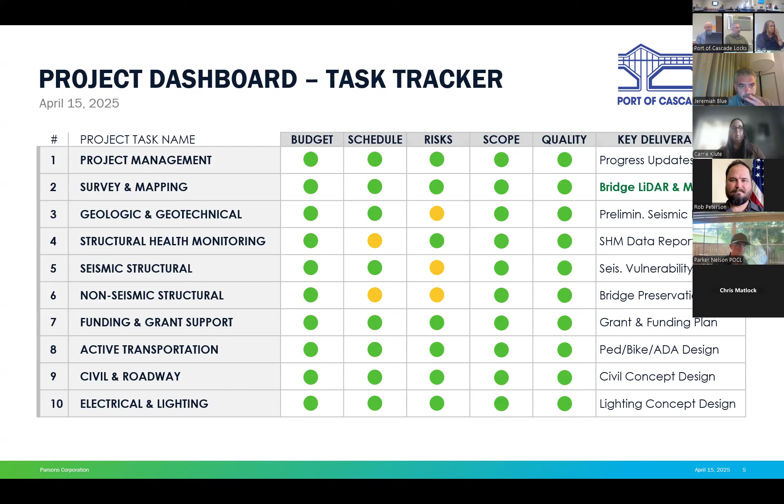So you can see we completed the survey and mapping, and the next thing that we do intend to complete is the bridge drawing set. I'm not going to bore you with that today because it's about 30 plus drawings right now of the bridge, the drawings that we didn't have. And that's quite useful in terms of current analysis as well as any future plans. Imagine if you wanted to widen the bridge or put a bike path on the side - we need those drawings to be able to do that.

So the real milestone for funding and grants is the grant funding plan. We actually did have a workshop where we talked about what are the potential funding opportunities. There's quite a few out there, a lot of them are tied to federal funds. So there's a number of steps along the way, deliverables, we'll call them, to get to that grant and funding plan, but that's still a work in progress. Did I answer your question? Yeah, okay, thank you.

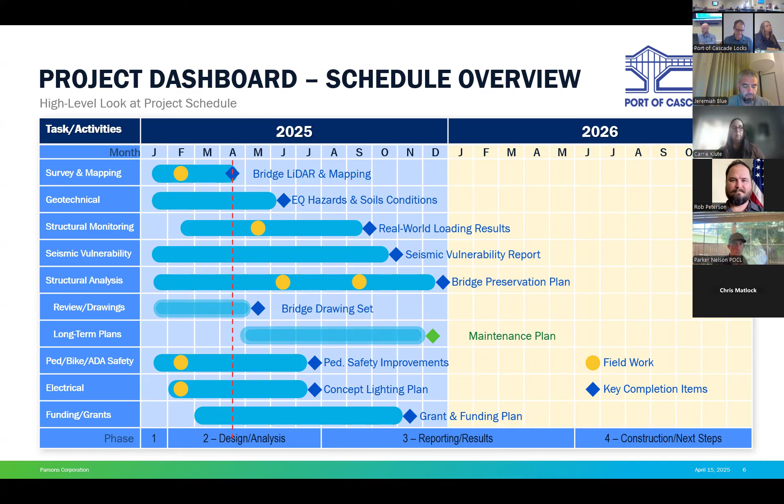Okay, so a couple key updates. Field survey and drone scan is done. We have a 3D model of the physical world, the slopes of the ground, the railroad. We can use that model for all kinds of things for design and for construction eventually.

We held a small internal workshop on funding to talk about what's possible, what's out there, and start to think about if the board is interested in pursuing additional funding from external sources, what kind of projects would we actually be able to align with that funding opportunity. For example, putting lighting on the bridge - is there a funding or grant opportunity out there where the board could seek that grant and get some funds to be able to do that?

Another example is ped bike - any kind of ped bike improvement. There's a lot of grant opportunities out there, and Genevieve is pretty aware of a lot of these things too. So we're starting to tie together the physical improvements needed on the bridge and off the bridge, approaching the bridge, and how we could actually go after a grant or package things together without just going in with a huge ask to the states or the feds. Lots more to come on that later. I'm happy to answer questions, but we're not ready for that to be a focus today.

We do have a structural health monitoring plan, and it's ready to go. That's putting strain gauges and all kinds of cool gadgets on the bridge to measure what's happening on a day-to-day basis, where we can literally tell, hey, a truck went by, this was the weight of the truck, and this is how the bridge responded in terms of stress. We can then take that information and translate it to things like lifespan of the bridge, and determine what's the right thing to do in terms of retrofit. There's quite a bit coming there in the future - I'll spend a lot more time on that later too, because those field installations are coming up pretty soon.

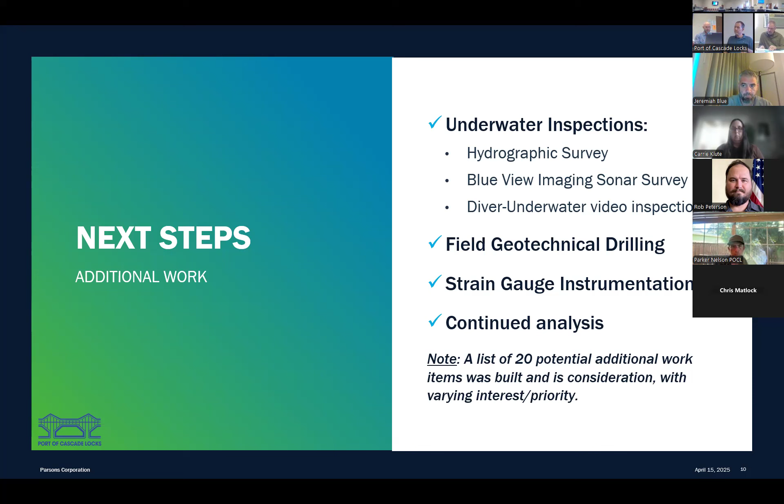Well, if it's decayed or missing something, or there's a big scour hole, and if you're curious, go stand out by the bridge on the Oregon side in that little viewing area. If you look at the river, you can actually see these big turbulent pools around the backside of the pier on the downstream side, and that creates scour holes at the edges of piers.

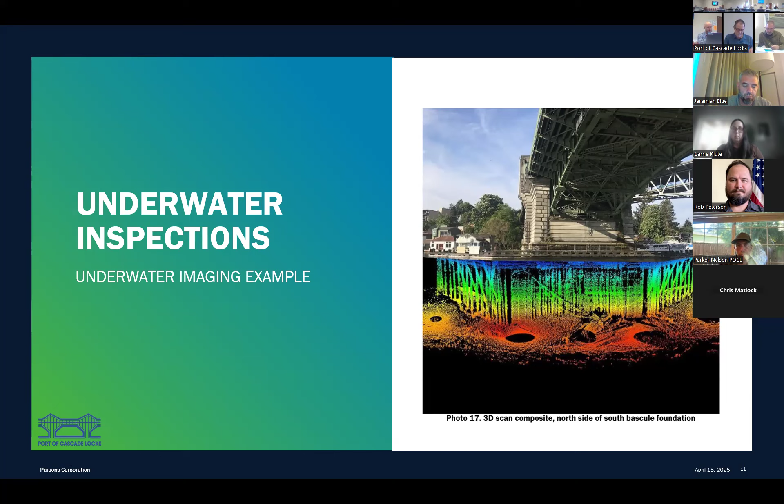So currently we have a plan. There's 5 potential borings, so drilling down, 2 in the water, which we probably won't do because we don't think we have to have them right now. So we're going to hold off, and they're expensive. So we're just going to wait on that. That doesn't make a ton of sense, but...

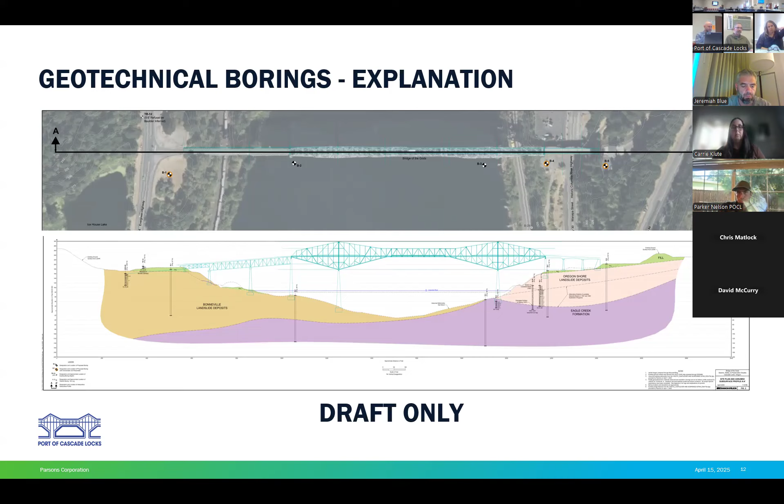So that was a pretty deep dive. I think that was my 20 minutes.

So anyway, I'll skip over this because we kind of already talked about it, but there are things coming out in May and June that will be physical field work. So now I have some fun things for you here, and I'll go through this kind of quickly.

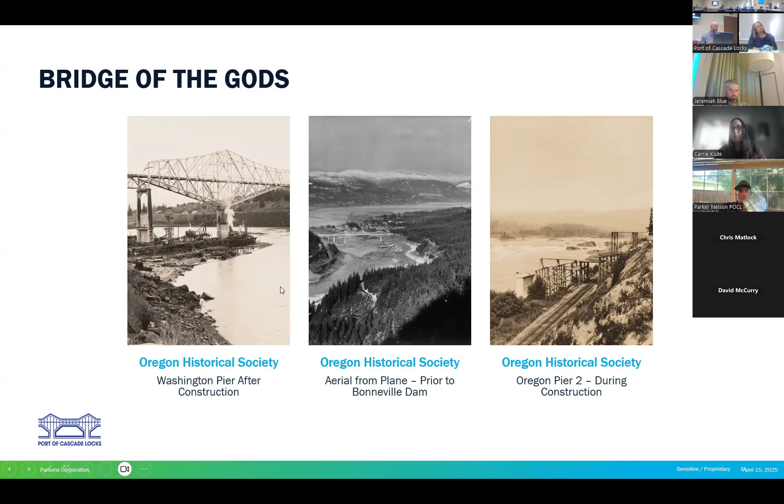What's eluded us this whole time is who actually designed the bridge and who actually built it. We had believed the Wauna Toll Company, just a rich family in Walla Walla, started up a company called the Wauna Toll Company and financed the project, but they didn't actually build the bridge - they contracted out to somebody to build it. So I was looking at this photo, and sure enough, on the right side, there was a sign - and sure enough it read Puget Sound Bridge and Dredging Company, engineering and construction, Portland, Vancouver, Seattle.

I thought, well, that's a pretty good lead from the Oregon Historical Society. Very cool. And they were on my radar for potentially having designed and constructed this, but we didn't really know. There was nothing in the Wauna Toll Company records in Walla Walla that said anything about this company.

So I went up to Seattle. Actually, I was already talking to him, so I kind of chatted with him back and forth. And I said, do you have anything there on the Bridge of the Gods? Nothing digital, he said, but there were some folders and a couple boxes of stuff. Oh, all right, I'll come up there and take a peek. So I took a trip to Seattle.

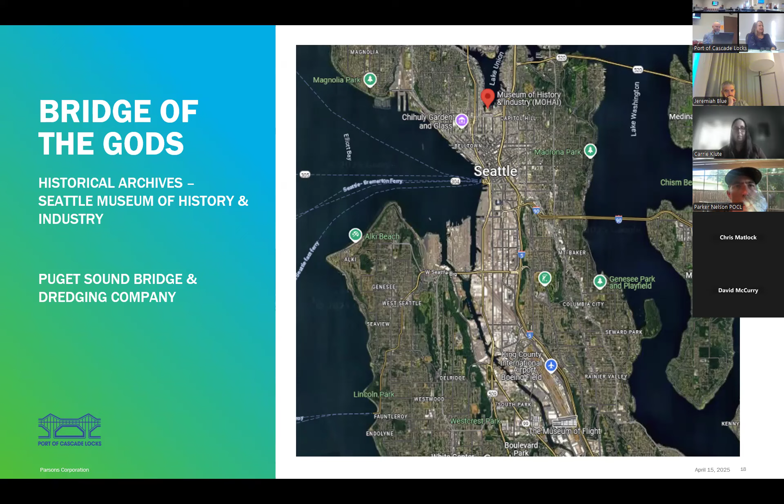I'd actually been here before, this museum. I'd actually talked to them already, and they were like, nah, we don't have anything. So I was digging deeper through their records, and I'm like, there's a folder here, and it says Wauna Toll Company, and we got to take a look, right? So I went up there, and found out more about this Puget Sound Bridge and Dredging Company.

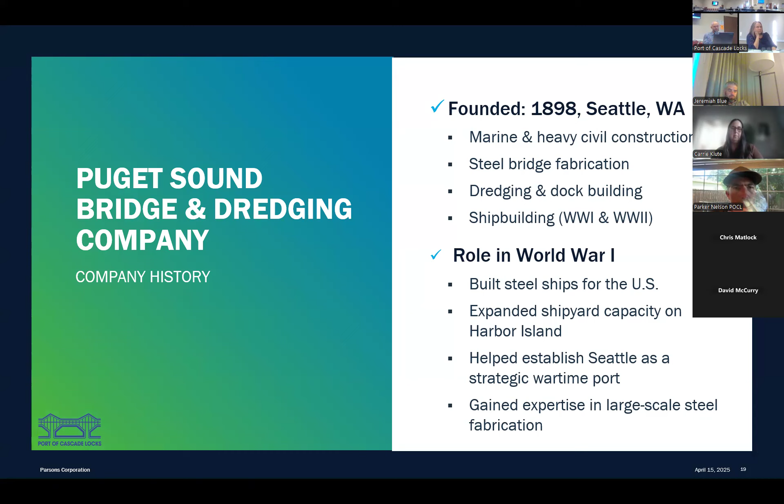If you're a history buff, basically the story goes like this. They built ships in World War One, and then World War One ended. And then in between World War One and World War Two, they did things in the US like build bridges and dredge to help build up Seattle. This particular company actually helped build Harbor Island, which, if you know, Seattle is a huge shipping area right now, and historically it was actually where they built a lot of ships, especially during World War II.

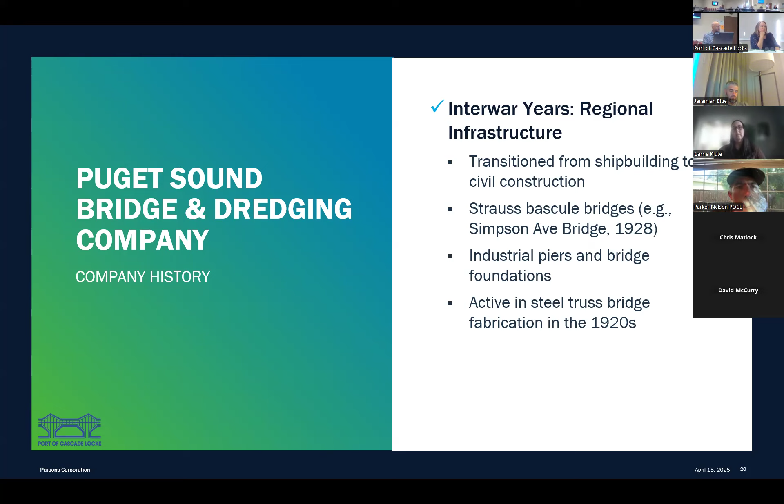Eventually, it got bought by the Lockheed Company and sort of dissolved. The Lockheed Company portion of the shipbuilding dissolved and ceased in 1987. But there are some archives.

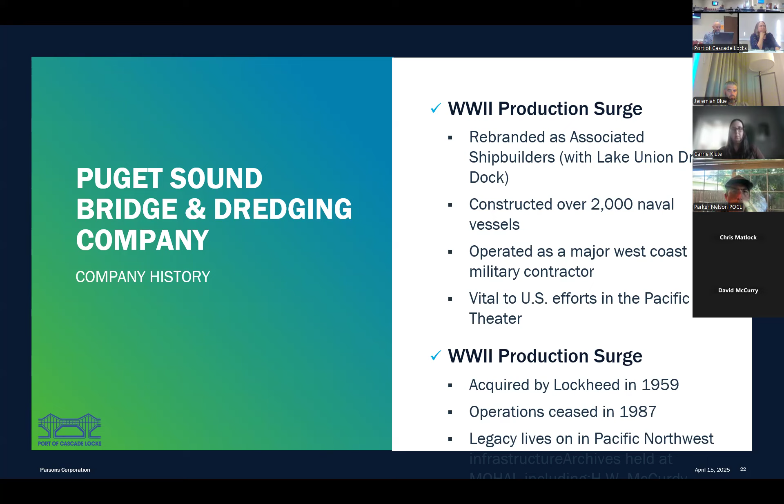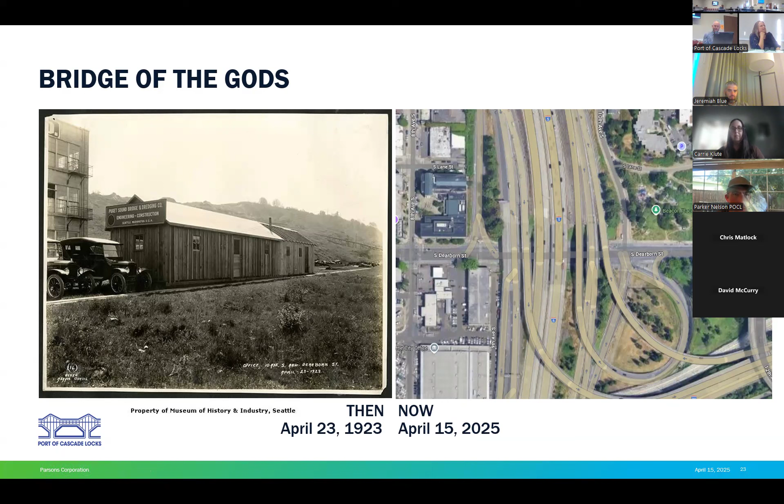So that's kind of an interesting find. I just thought that was interesting.

And sure enough, I went there to the Museum of History and Industry, and there's a little binder, or a little folder really, of what essentially was some bridge builders' trophies—I call them that because I keep these too. They're pictures of something you did: you built a bridge, you designed a bridge, you saw it up during construction. And sure enough, there's these really old photos of many steps in the construction of the Bridge of the Gods.

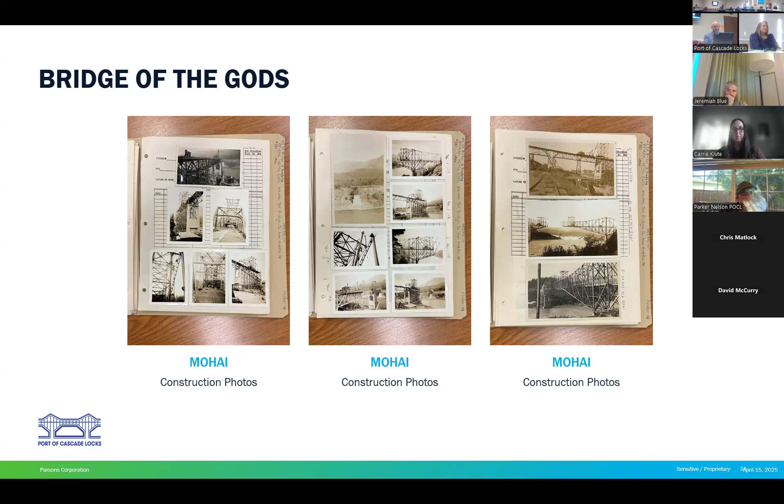Cool, and I mean, I've never seen these before. There's a number of these that tell quite a story in terms of how it was built. Now, again, this was in 1925, 26, so it wasn't the raising of the bridge—this was the original building of the bridge. It tells us how, I'll maybe do a little history presentation later on, but it tells us how the stresses were locked in and how it was constructed, which is really important.

There was a binder as well. This is interesting, a binder, or really a scrapbook essentially of old articles of all the different bridges that the Puget Sound Bridge and Dredging Company had built throughout the Northwest, a number of bridges. So anyway, I think they bought the San Francisco Bridge Company at some point, or at least took over their Northwest operations based out of Seattle.

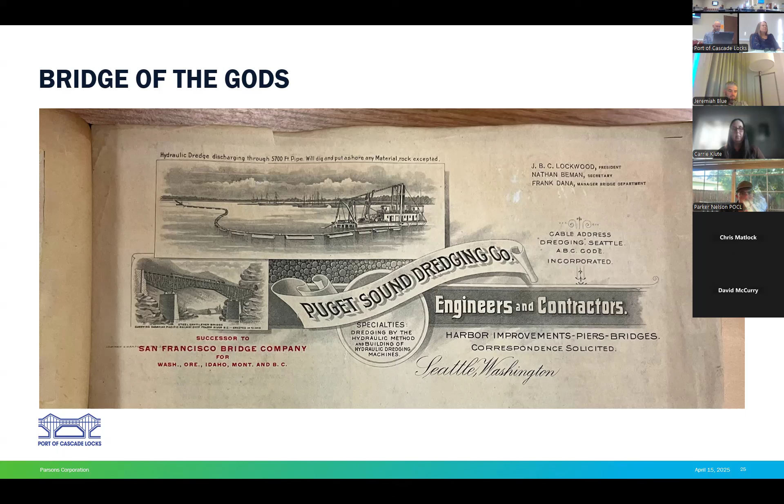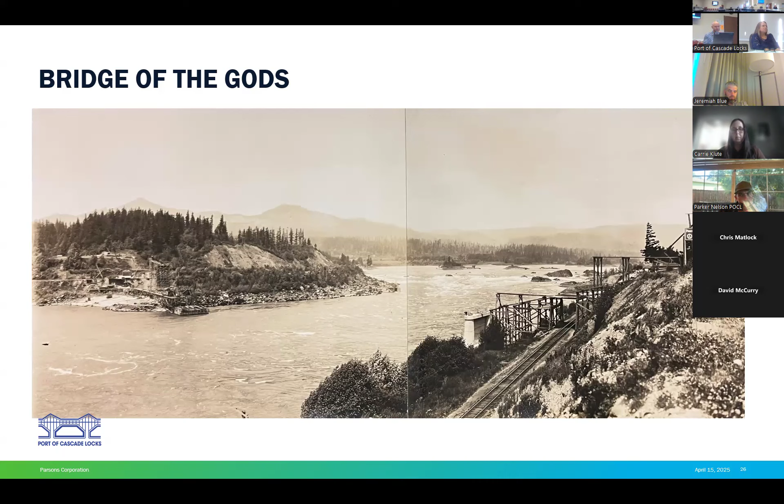And I did find the same photo that I found with the Oregon Historical Society. It's different in its resolution. I think that somehow or another, the same photo made its way to Oregon and to Seattle somehow—this was in whoever owned this little binder of pictures. So super cool, and this is only one of the many pictures in there.

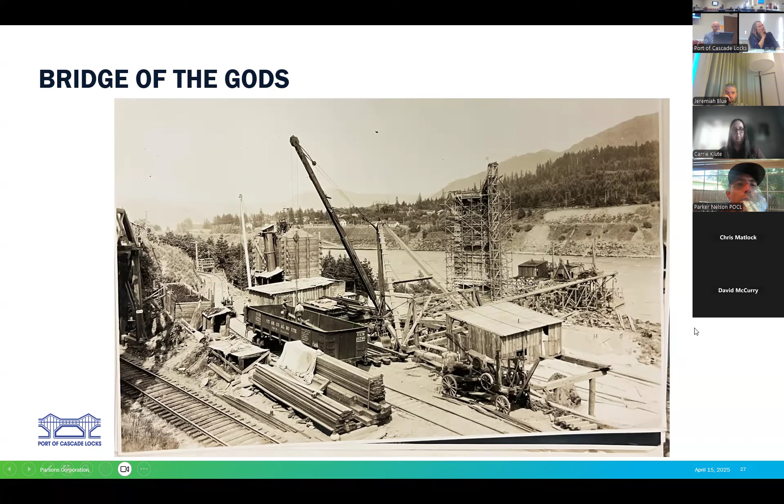I kind of zoomed in. There's a lot you can see here. So basically, we knew they probably shipped the steel by rail. They shipped the steel to the site, and then they built a separate little rail path to get to the bridge and brought the steel pieces from the main railroad to the bridge. Interesting fact, and this picture tells a thousand things about how they went about the construction of the bridge. I thought it'd be interesting just to share. That's cool—this shows you how they started from the Oregon side.

So basically they built a bridge from what's now the pier with the mural on it, and they built it out. This thing sticking up is just timber framing used to balance and cantilever-construct the bridge. What's built becomes a backspan weight, and they proceed to build the bridge out into the river using that backspan counterweight to hold it down so it doesn't tip into the river. That's how the Bridge of the Gods came to be.

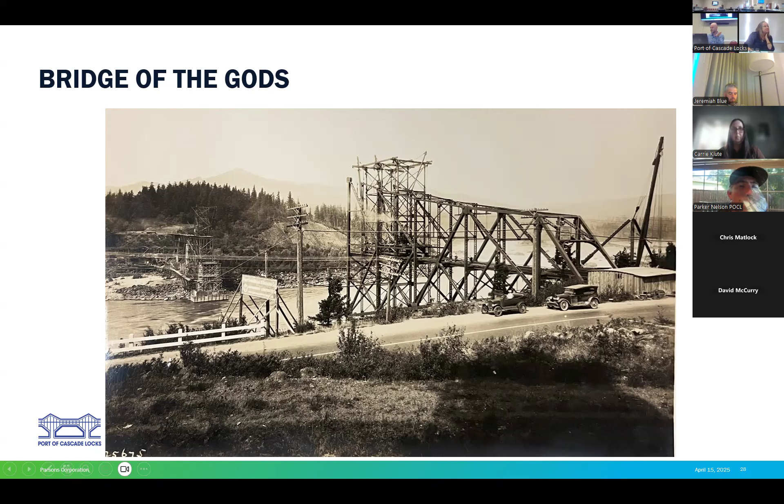We kind of knew that's how it would be done, but there are a lot of little details in how they assembled this that are actually quite useful. This is just a small collection of the pictures I took, and the high resolution scans are being worked on right now, so we'll get those pretty soon.

End of the story, maybe, is I'm not sure the story's all done. If you watch the YouTube video, I have my own conspiracy theory that the Puget Sound Bridge and Dredging Company maybe worked with the nearby Wallace Bridge and Construction Company, since they're both located in the same place. I previously mentioned that somebody wrote on one of the steel members something about Seattle, Washington, and you can't really tell, but the archive people agree with me that it looks like it says Wallace Company.

So the archives, MOHAI, as well as University of Washington, are actually looking through their records to see if there's anything else that might contain the bridge plans. I think that'll probably be the end of the research, to be honest—if we don't find them, we just don't find them. But that was a pretty deep dive and got us to an interesting place.

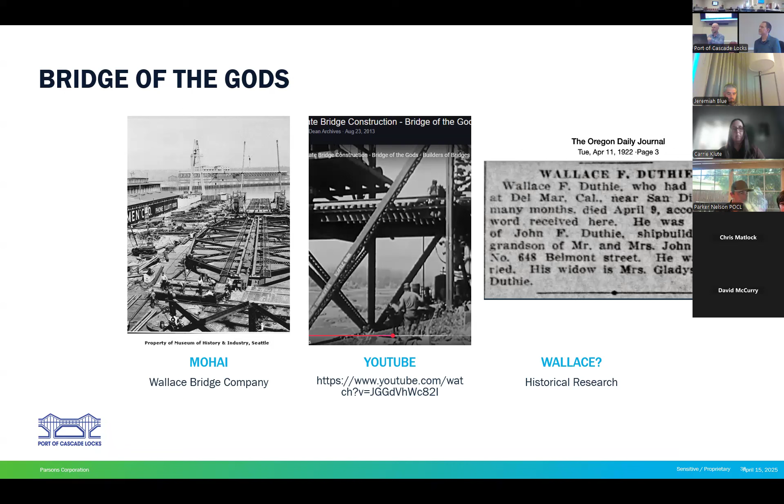This, interestingly, is the steel fabricators in Seattle at the Wallace Bridge and Structural Steel Company. Honestly, there's so many people in this photo—I have a strong suspicion this is actually where the bridge was fabricated, which would have been right next to the Puget Sound Bridge and Dredging Company. It's a hard thing to tell, but I thought it was interesting to see people 100 years ago, around 1925, who probably had some hand in building the bridge. Pretty cool. Anyway, there's your deep dive on history.

I'm very done, cool. Any questions? Yeah, that's pretty cool. That's great. Anybody have any questions about that? Oh, it was just a really cool presentation, thank you so much. Yeah, I mean it's the port's bridge and it has an incredible history by itself. So does the canal, the locks, but it's interesting how we live in these little windows and there's all these things that happen long before we're here. Thanks, David, it's good stuff. Really good stuff. Cool, all right. Thanks, David. Thank you.